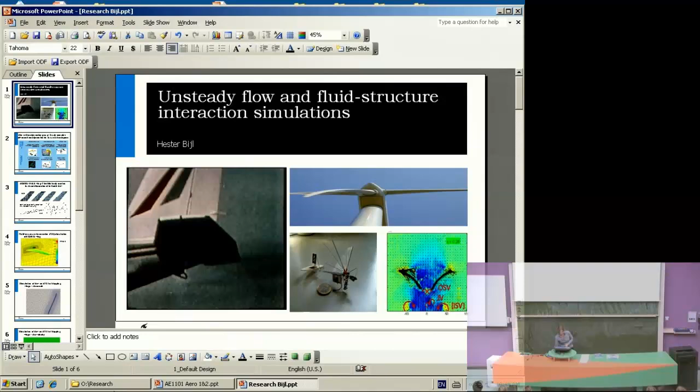Welcome. Yes, please, thank you. Welcome to the second part of the lecture series of Introduction to Aerospace Engineering.

My name is Hester Bijl. I'm full professor of aerodynamics, and I will teach you the part focused on aerodynamics the coming 2.5 weeks. The first lecture, the main book is Introduction to Flight. We hop a bit through it because the standard atmosphere in chapter 3 has already been treated, but I'd like to start with the basic quantities in chapter 2 today and then skip to chapter 4.

Nando Timmer, my colleague, is teaching the Dutch class.

So Anderson, chapter 2, and chapter 4.1 to 4.3 today. Quite important people for this part are Leonhard Euler and Daniel Bernoulli. Aerodynamics, as you probably already understood, having worked with concepts of lift and drag already, is crucial.

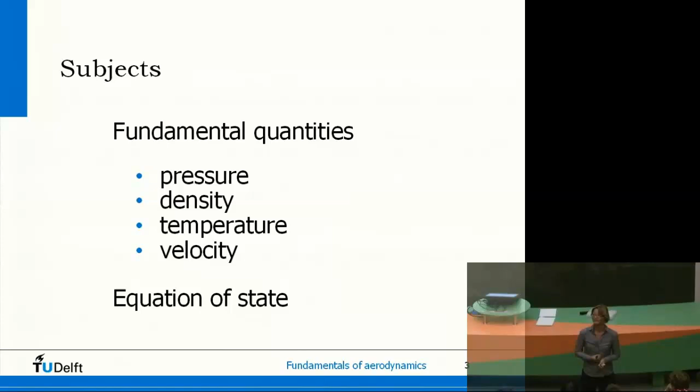Then the relation between these two, the equation of state, coming from chapter 2 - you've played around with it already with the standard atmosphere, but I'd like to make you aware of this relation between the basic quantities. Then in the second hour of the lecture, we will move to the relations between velocity - not only the basic quantities pressure, density, and temperature, but velocities and pressure. So: pressure, density, temperature, velocity, equation of state.

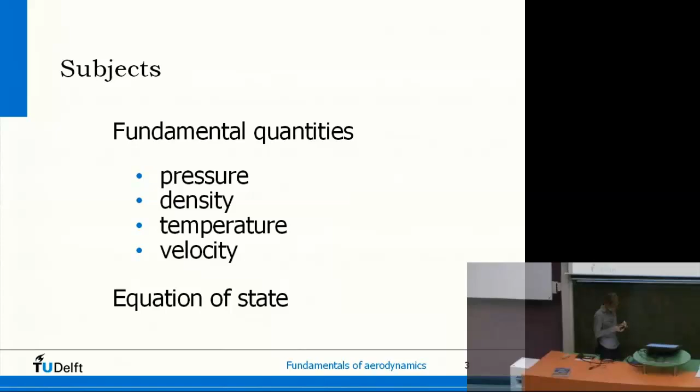No, this is not working. Yes. Okay.

So what is pressure? Well, pressure is what you feel when you push on something. Pressure is force on a surface. Quite often people get confused about the dimensions of pressure. If you think about what pressure is, you can push on your hand, or feel air pushing on your hand - if you put it outside a car window when somebody's driving, you can feel a certain force. Pressure is force on a surface, so it's the normal force - in a direction normal to the surface - and it's force per unit area.

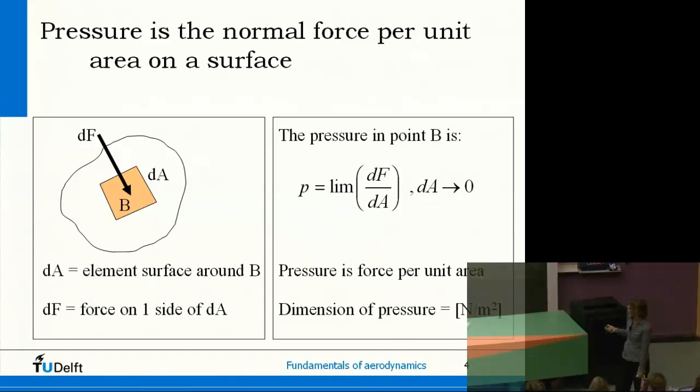So how do you then define pressure at a point? Because we work with pressures at points in this room or in certain flows. Well, you define this by taking an infinitesimally small surface area, thinking about the force on that, and then taking the surface area to zero. Then you have a definition of pressure at a point.

So suppose we have a blob of gas or flow, with a surface at this blob called B, and a certain small force on it in the normal direction. This is an element surface, with a small force dF on one side, in the normal direction. Pressure is defined as force per area - dF over this small area dA - in the limit when dA goes to zero, when the surface goes to zero. Then we have it at a point.

Important to remember is the dimensions of pressure. The dimensions of pressure is the dimensions of force divided by the dimensions of area. And we work with SI units, so that's Newton over meter squared. So this is important to remember, Newton over meter squared for pressure.

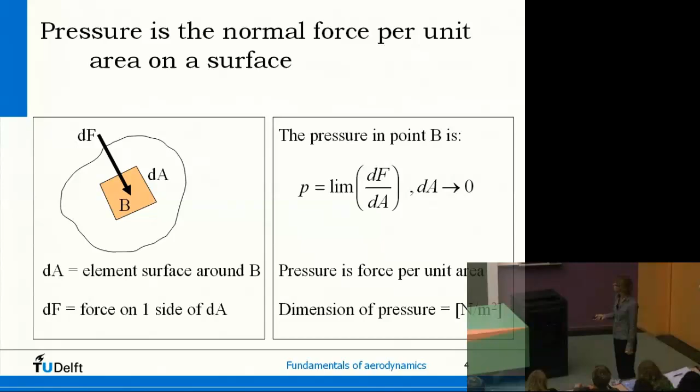Well, we can do the same with density. Density, we would like to talk about density at points in the flow, any point. Density says something about how many kilograms fit in a cubic meter, sort of how much a cubic meter of gas weighs. That's sort of a volume. So how do we go from this volume to the point?

We do the same trick again. In this case, we have a very small volume, dV, here at this point B. And then we say, density of a substance is mass per volume, so kilograms per meters to the third. We start with this very small volume, and we know how much it weighs, and then we take the volume to 0. So density is then the small mass of this volume, dm, over the small volume, dv, when we take the volume to 0.

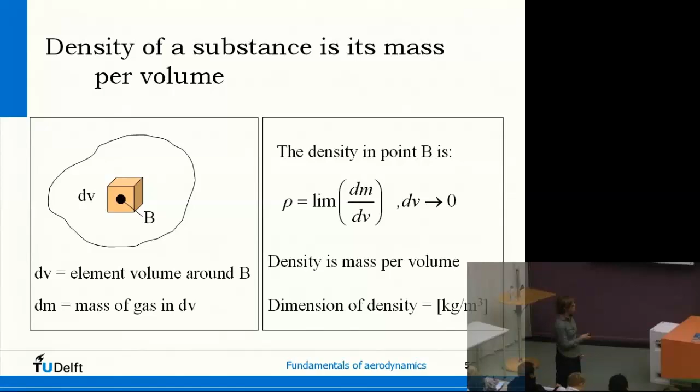And then, of course, what is the unit? The unit of density is the unit of mass per volume, so kilograms per meters to the third. So again, then we have it in a point.

So that was pressure, density, now temperature. Temperature is defined differently. The temperature of a point in a gas is related to the kinetic energy of the gas. And what is kinetic energy? Well, each gas or liquid consists of molecules, and these molecules move. They have a certain kinetic energy, they sort of vibrate. And this vibration, this kinetic energy, is related to the temperature.

And this is one of the fundamental relations of temperature, you see it here, T, and kinetic energy. How are they related? They're related linearly with a certain 3/2 and a certain Boltzmann constant, which has a dimension, Joule over Kelvin. So a high temperature reflects a high kinetic energy in the gas, so the molecules are sort of vibrating quickly.

What dimension of temperature do we work with? Well, of course, if you're Dutch, you're very used to Celsius, 15 degrees Celsius, 20 degrees Celsius. But actually, we prefer to work with Kelvin. So we work with the dimension of temperature, Kelvin. The relation between Kelvin and degrees Celsius is not so hard. They only have a different point of 0.

So Kelvin, you can work from the one to the other, like with this: Kelvin is 273, if you want to be very accurate, 273.15, plus Celsius. So 15 degrees Celsius is 288 Kelvin.

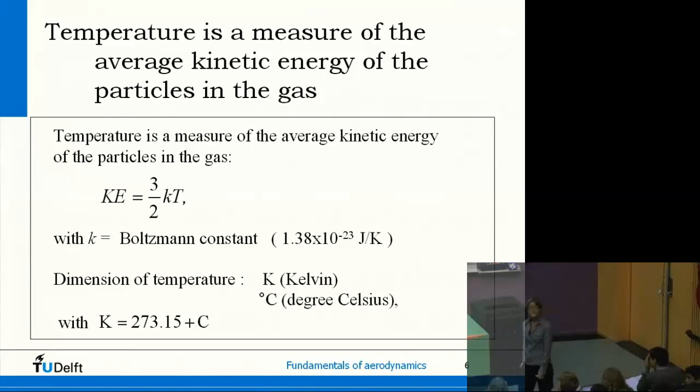Now, what is important is the relation between these three: we have pressure, density, and temperature. And they are related. So once you know two of them, you can find the third. And how are they related? That is with the equation of state, it's called. And the equation of state is the following.

There are different forms. Some people at high school have had a molecular form, where they think about sort of moles of gas for the equation of state. We think of the equation of state as points in our gas, and the only difference is that we have a slightly different gas constant in this equation of state. So the relation is the same, but we have a different form of the constant. But please, this one you really should remember, crucial.

An aerodynamicist and an aerospace engineer should be able to wake up in the middle of the night and reproduce the equation of state. Crucially important. That is the relation between pressure, density, and temperature. Now, how are they related? P is rho RT, and this R is the gas constant.

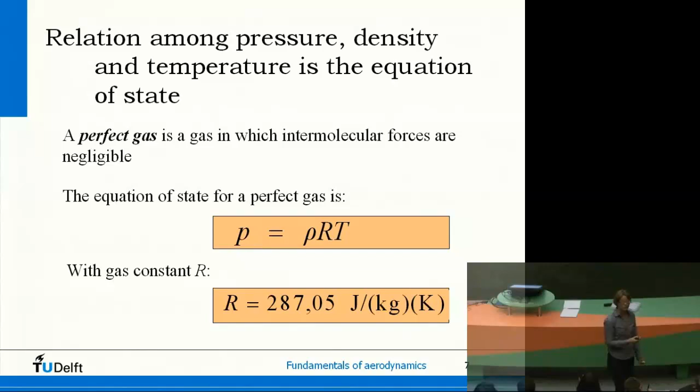When you really compress the gas very much and the molecules come very close, you have a non-perfect gas anymore, and then you can get additional terms in your perfect gas equation. These are terms with constants A and B, and you get a more complex relationship. You get P over T in here and P over T to the third. This is called the Berthelot equation.

A and B are constants, like R, the gas constant, but they have different forms.

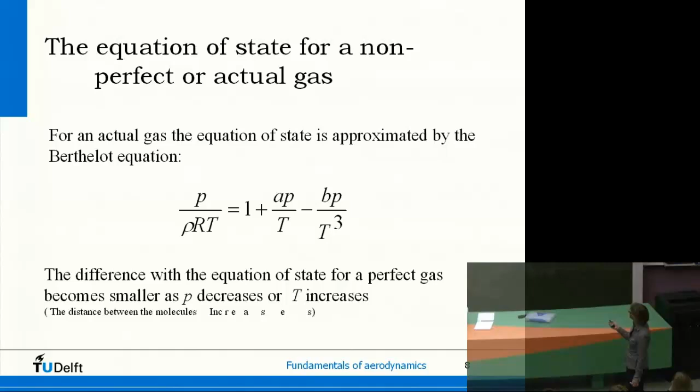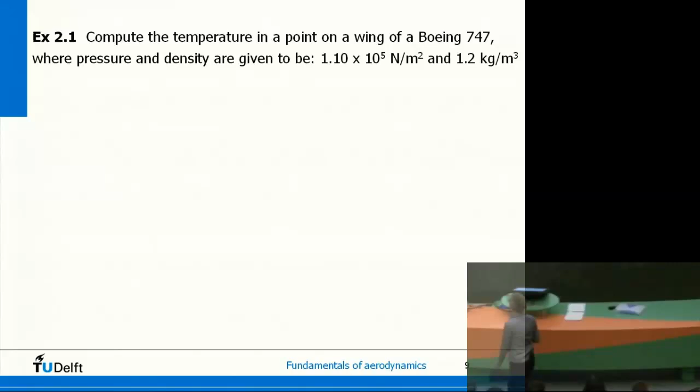Okay, so now that we have the equation of state and we have P, rho, R, and T, we can play with these things and start making very simple examples. So the first example is to compute the temperature on a point on a wing. It's example 2.1 from Anderson, from the book.

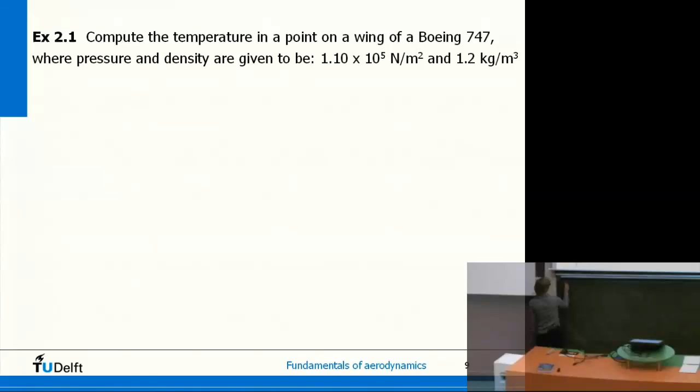On a point of a Boeing 747 where pressure and density are given. Well, what relationship do we have between pressure, density, and temperature? Rho RT, P is rho RT. Indeed, equation of state.

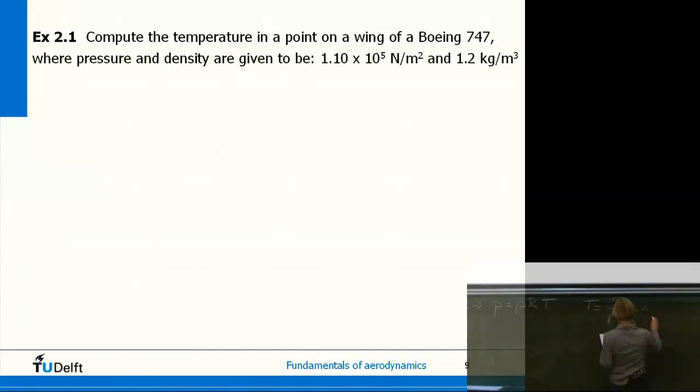We're looking for the temperature, so we have P is rho RT, so T is P over rho R. Well, simple, pressure is given as 1.1 times 10 to the power 5. Rho is given as 1.2. What do we do with R? 287, yes, perfect.

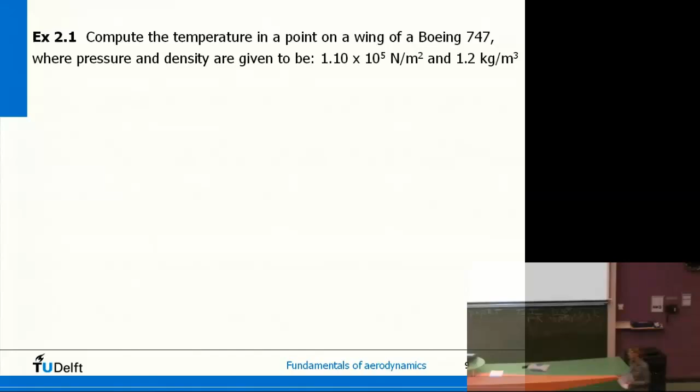And we find that it's 319 Kelvin. So simple relationships we can play with. Of course it will be more difficult later. Then there are certain conditions that you need to remember. You cannot remember, of course, all conditions at all heights.

Jacco Hoekstra introduced you to the standard atmosphere. You should remember the values of rho, P, and T at standard sea level conditions. And what are these? Well, P is 1.01 times 10 to the power 5, or if you want to be accurate, you take into account the 325. So 1 atmosphere actually, that's the pressure at standard sea level conditions.

The density is 1.225 kilograms per meter cubed. And the temperature at standard sea level conditions is 15 degrees Celsius, which is equal to 288 Kelvin. So please also remember these, it's important for an aerospace engineer. Also on the exam, we assume that you know these conditions. All the others you can of course derive using the standard atmospheric relations.

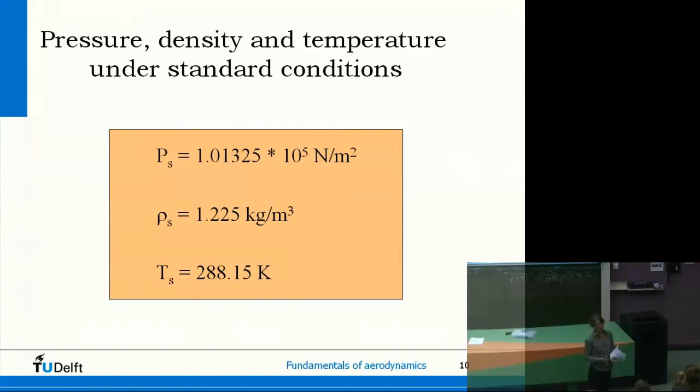Okay, then we can also do something like computing the total mass of air in a room, something like this, 30 meters by 50 meters by 3 meters. We will use the computational approach for this later in the second lecture. So how do you go about this? Suppose I ask you: what is the mass of air in this room?

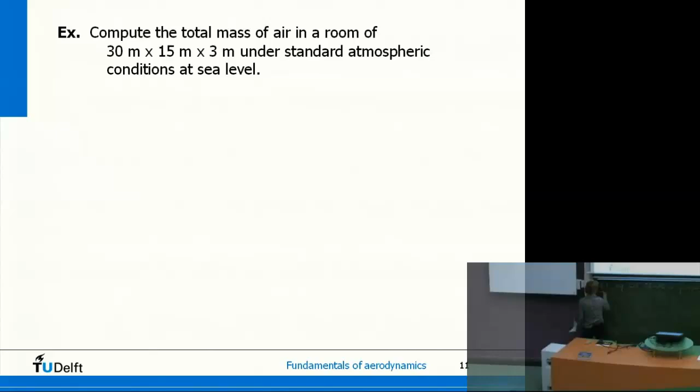Density, very good start. Density is mass per volume. So mass is density times volume. So what is the density?

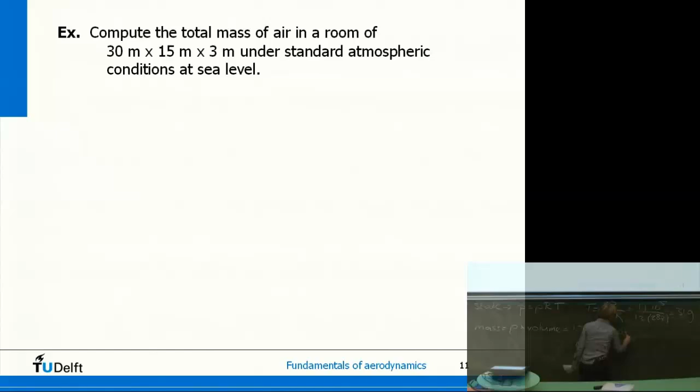Standard conditions, 1.225, thanks, so standard rho at standard sea level. The volume's given there, 30 times 15 times 3. The volume is actually 1,350 meters cubed.

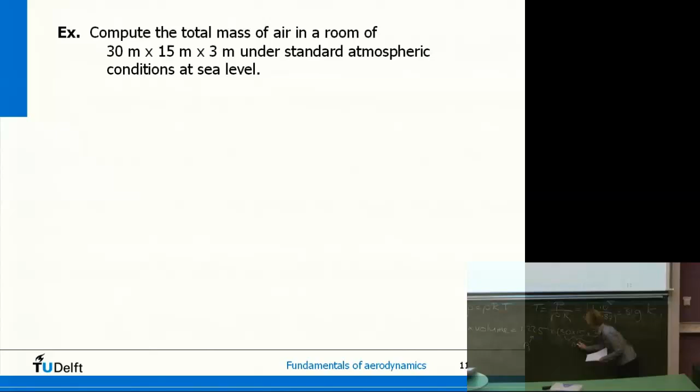Sorry, meters to the third, thank you. And then you find that the total mass of air in this room is 1,654 kilograms. So quite a bit.

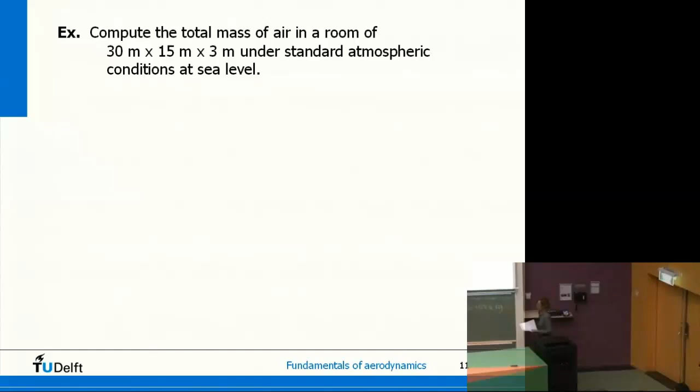And indeed, if you have no idea how to do this, you can think, okay, density was kilograms per meters to the third. So through the units, you can come to this solution.

Now, density tells you something about the mass of a cubic meter, so how much it weighs, or the mass of this lecture hall. But sometimes it's the other way around. You're interested in how much space a kilogram of gas occupies. And that is the specific volume.

We're struggling a bit with the notation. So the curly V is used in Anderson, and I will try to stick to that. So the definition is very simple, 1 over rho.

So the dimensions of the specific volume: specific volume is 1 over rho, so that is 1 over kilograms meters to the third, so it's meters to the third per kilogram.

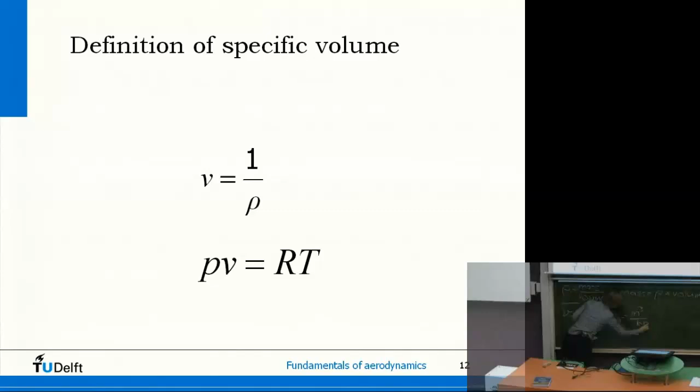So it's quite simple. Why would you even be bothered? Well, sometimes it is easier to think about how much space a kilogram occupies. And then you get a slightly different form of the equation of state. P is rho RT, so we had rho here. So if you have the specific volume, 1 over rho, you have P divided by rho is RT, or PV is RT. We will get some other V's for velocities later.

So small curly V is specific volume. Okay, and then you can do simple things like this: compute the density and specific volume of air in a wind tunnel at a certain pressure condition and a certain temperature.

So how would you go about this? Choose the right units first. So let's see, compute the density. Density, we're looking for density in kilograms meters to the third. The right units. So we have P in atmosphere and temperature in degrees Celsius.

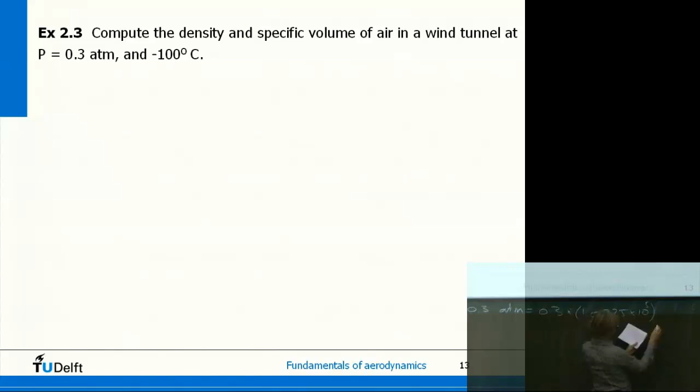So how do we go from atmosphere to newtons per meter squared? 101,325, exactly. So this you should always remember. So 0.3 atmosphere is actually the same as 0.303 times 10 to the power 5 newtons per meter squared.

Then we have a temperature, but it's in Celsius and we need it in Kelvin. Simple again: minus 100 degrees Celsius is equal to minus 100 plus 273, which is 173 Kelvin.

Now how do we compute the density? Density? Anyone? 1 divided by the specific volume. Sure, so how do we compute the specific volume? Rho V is equal to RT. Sorry, PV is equal to RT, right? Or P is equal to rho RT.

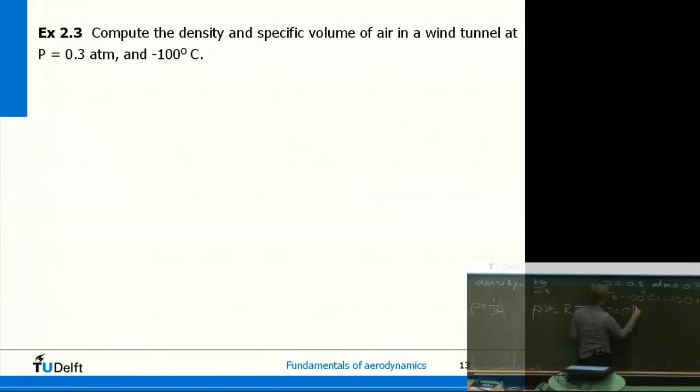Okay, let's take the PV form. So V is equal to RT divided by P, is equal to R is 287, temperature we just computed 173, divided by the pressure 0.303 times 10 to the power 5. And then we find the specific volume, 1.6 meters to the third per kilogram.

So PV is equal to RT, and then indeed rho is 1 over that, and we find 0.61 kilograms per meters to the third. So simple. You could of course also compute first the density and then the specific volume.

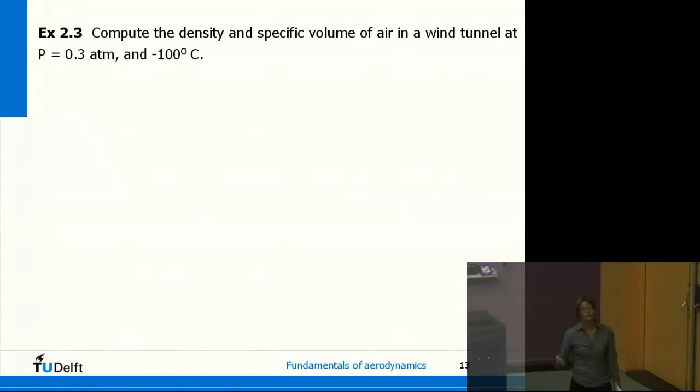So these were all point properties and scalar quantities. So these quantities, pressure, density, temperature, are scalar values. Of course, in the flow, we also have velocities. And velocity doesn't only have an absolute value, a speed, but also a direction. So we have here a vector, a velocity vector.

So it has a certain length, a certain absolute value, and a direction. And then what is the definition of the velocity? Well, the definition of the velocity is the length it travels over the time it travels, and this length then has a direction. So it's ds over dt, and again, we want to talk about velocity at points, so we take the limit to this point. So a very small fluid element sweeping through the very small length it travels over the very small time.

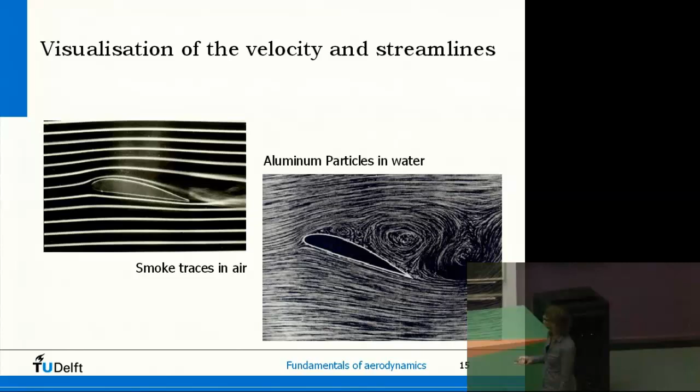Here we have almost leading edge separation. So you see the flow doesn't really follow the object, but separates. You get large blobs, sort of a dead air region, large vortices. And this has a detrimental effect on your lift. So it's crucial to know when you have stall characteristics. So, visualization, velocity. Now some more definitions.

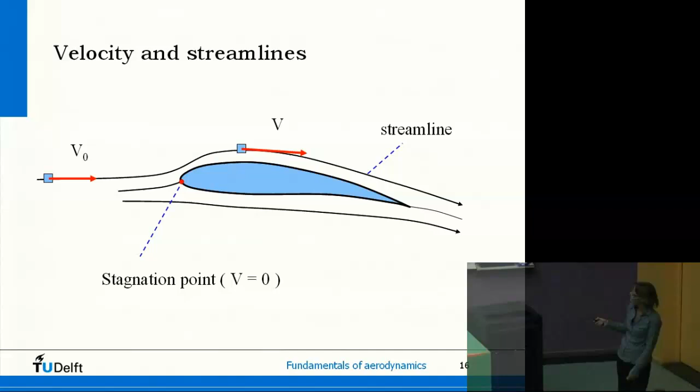So we have a definition here: the stagnation point. As you saw, the flow comes over the wing, the streaks of the smoke from the previous picture. You get streamlines like this. At a certain point in time, the particle is here, later there. We have here a stagnation point, and that is defined as the point where the dividing streamline hits. All the flow above this dividing streamline goes on top. All the flow below goes below. So that's a stagnation point.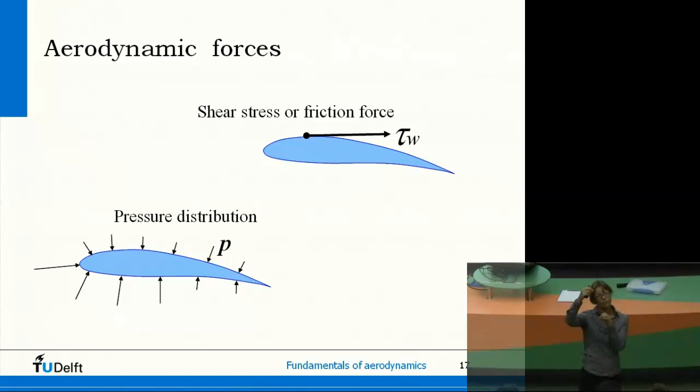So here we have pressures. And the other force is then in the tangential direction, so along the surface. And that's called shear stress or friction force. Any flow, even air, has this, because really at the surface, the velocity is zero. Further away from your wing, you have quite a high velocity, and then inside the boundary layer, the velocity decreases to zero. And this gives a friction force on your object. More on this in the viscous flow chapter.

So, two aerodynamic forces: pressure forces and tangential forces. Which one is the most important in general for lift? Pressure, yes. Because we're looking for lift, of course, an upward force. If we have a very high angle of attack, tangential force has a certain contribution, but the largest contribution in the direction of the lift is due to the pressure.

And does this airfoil have a positive lift, you think? Yes. How do you see? How do you find it? You integrate pressures, right? Yes. So you think about how much force you have pushing it down, how much force you have pushing it up. So you integrate the pressure over your airfoil, and you find that the net contribution of all these arrows of the pressures is up. Okay.

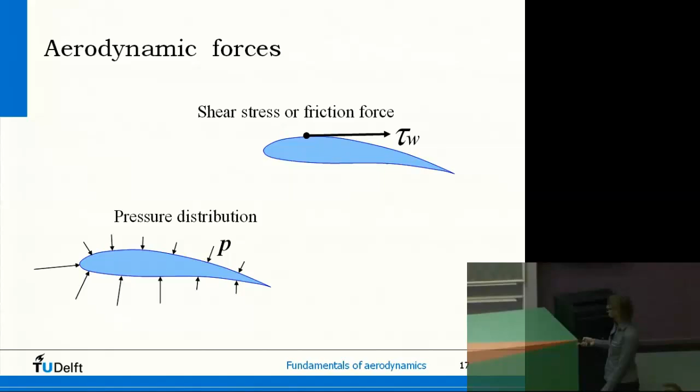Now, for you to practice, this will only take you 5 minutes, but please practice with this equation of state. It has to be standard because we make it more difficult every lecture. So once you're automatic on this, you never have to look at it again. So I advise you to do some small homework exercises. Problems from Anderson. I'm not sure it's still the page number because it might have been the previous edition. So it is on page 107, sorry. So instead of 102, if you have the latest edition, it's 107, in the 7th edition.

Any questions about this part? No? Okay. Then we continue.

So first, introduction to the basic quantities: pressure, density, temperature, and the velocities. So far we only have a relation between the scalar quantities, the equation of state. So what we're looking for now is a relation that includes the velocities as well.

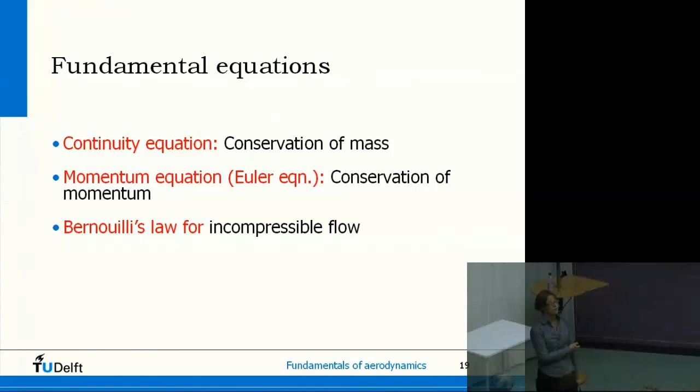So conservation of mass and momentum today, then energy, which is more relevant for high-speed flows, I will teach you next lecture. The conservation of mass equation is called the continuity equation, the conservation of momentum is the momentum equation, and we have a very simple form of the conservation of momentum for incompressible flows. I will tell you what incompressible flows are, and this is called Bernoulli.

So, first, the conservation of mass. I will clean the blackboards.

So this is a stream tube, we call it. It can be a real tube, but it can also be a stream tube in your flow with streamlines. If we have a streamline here, and a streamline there, and along we have streamlines, then flow that goes through this doesn't go out or in at the sides, because the streamlines are the direction of the flow, so nothing will go through the sort of walls. So just think of this as a tube.

And we have an inlet and an outlet, and a specific amount of time. Well, what happens to this tube if we have a steady situation? Actually nothing—the total mass of this tube remains the same, right? So what flows in a certain amount of time has to flow out. Mass is not created or destroyed. So if the mass is the same, what flows in has to flow out in a certain amount of time.

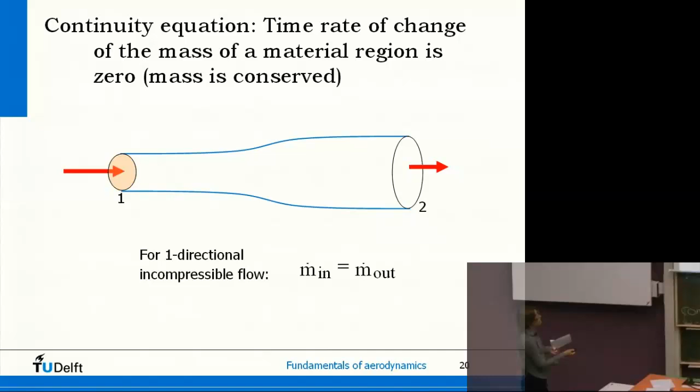So conservation of mass, it's rho AV is constant. Density times area times velocity is constant, and this is indeed the mass flow, so m dot. So what flows in, it's written here also, what flows in flows out, so dm/dt in is dm/dt out. dm/dt, the dm, the mass, is density times volume, rho times AV dt. The dt is dt, so the mass flow is equal to rho AV. Rho AV is constant, so whatever cross-section you put it at, rho1 A1 V1 is rho2 A2 V2.

Now, please note that also your density can change here. So for compressible flows, for flows around aircraft like Boeing 747 or so, the flow goes up to 0.8, sort of 80% of the speed of sound. And that's still subsonic, so the speed is lower than the speed of sound, but quite high relative to it. And as a result, we have significant density changes in the flow, so density plays a role here too. And with supersonic flow, it can even change very, very much the density and have a very strong effect on this.

However, for incompressible flows - and incompressible flows don't really exist, they are an assumption - the assumption is the density doesn't change significantly. When is this assumption valid? When you have liquids. Liquids, oil, water, we don't have much density changes. In a gas, you can compress it, and you can get the molecules closer, and you get strong density changes. Liquid and oil, it's much harder. However, with air, you can also have the incompressible flow assumption making sense.

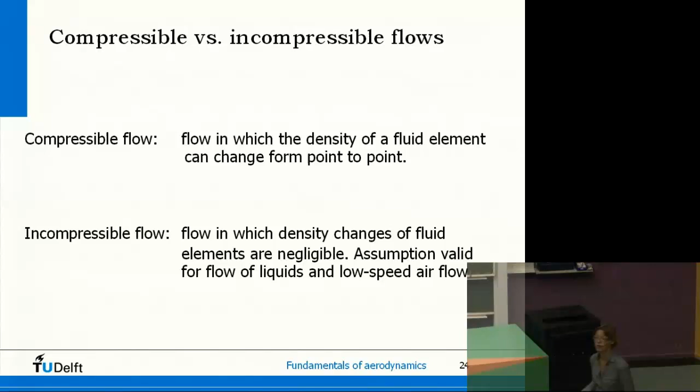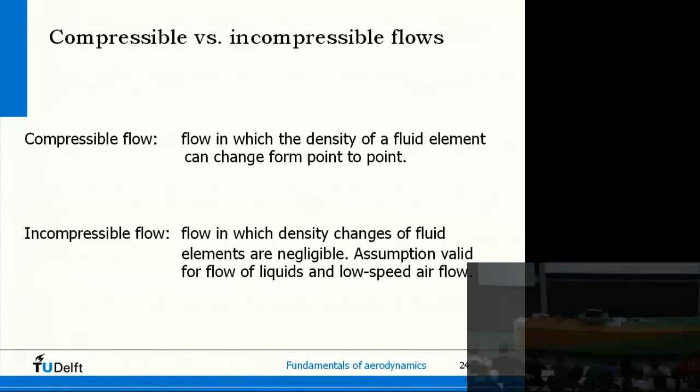Two types of flow, compressible flow and incompressible flow. And for incompressible flow, we have then a simple relation. So incompressible flow, rho is then constant in the flow. So AV is constant, so area times velocity. So suppose I have a duct like this.

Velocity. Yeah, it's a bit tricky, so I try, if I have volume, I try to write out vol, specific volume, curly V, but capital V is mainly velocity.

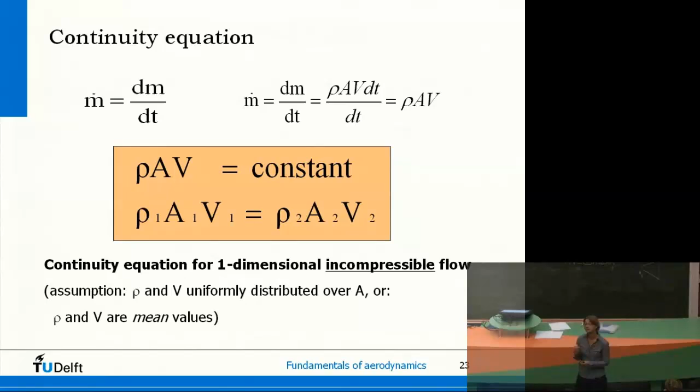For incompressible flow, we have AV is constant, so you get a very straightforward relation. If your area doubles, for example, your speed halves. But be aware that this is only for incompressible flow, really low speed subsonic flow for air. Because for highly compressible flow, supersonic flows, you can have the area increase and the velocity increase as well, because the fluid expands and the density changes so much. So in supersonic flow, if you increase the area, your speed increases. So AV is constant just for incompressible flow; in general cases you must incorporate the density.

Now we can do a simple example again. Suppose we have a converging duct, a converging channel, the other way around. So a converging duct is like this: flow in, flow out. Inlet area is A1, 5 meters squared is given. V1 is given, so the entrance velocity is given. And we have, of course, an A2, exit area, and a velocity at the exit. The question is to compute the area of the duct exit, A2.

So which relation can we use? AV is constant. Can we do this? Can we leave out the density, the rho, assume it's constant? Why? Because it's low speed, below 100 meters per second. The fastest speed is at the smallest exit. We don't know it yet, so it makes sense to check afterwards, but let's assume we have 5 meters per second, so we have 10 meters per second here, so probably we will not reach 100 meters per second, but it's worth checking. Oh sorry, we have it already. Yes, it's 30, so indeed the fastest speed is 30 meters per second, way below 100.

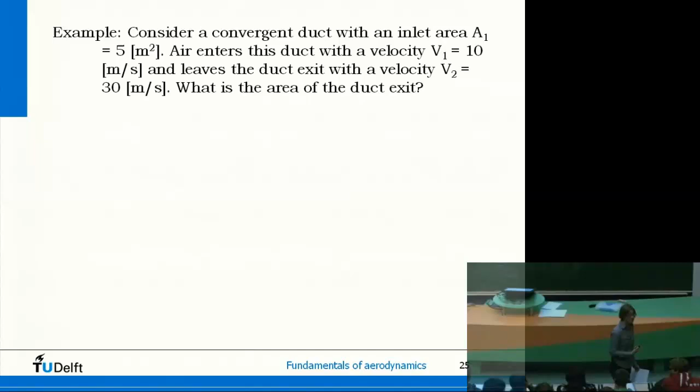Quite often in exam questions, we let you compute, or we give a point with a maximum speed. Then you can say, okay, that point on the wing is close to the maximum speed of the flow, that is below 100 meters per second, so I'm safe. That's what you generally do. In general applications, cycling, cars, gliders are really low speed subsonic. Takeoff and landing might be a bit faster but still low speed subsonic, but cruise flight of commercial aircraft is really not low speed subsonic—subsonic, transonic, but not low speed. So from the application itself you can already get a hunch.

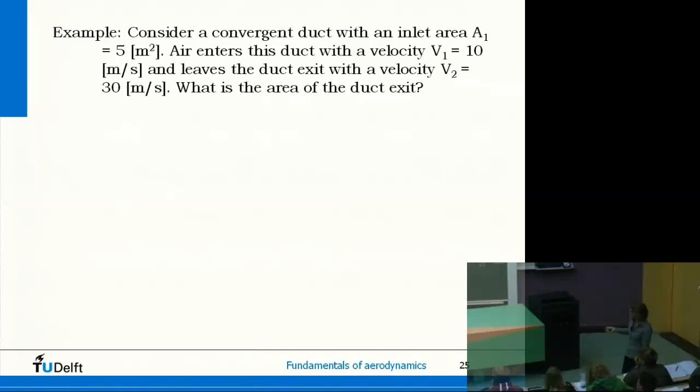That might be worth checking because you sometimes make mistakes. The area decreases and indeed the speed increases, so for low speed subsonic, that makes sense.

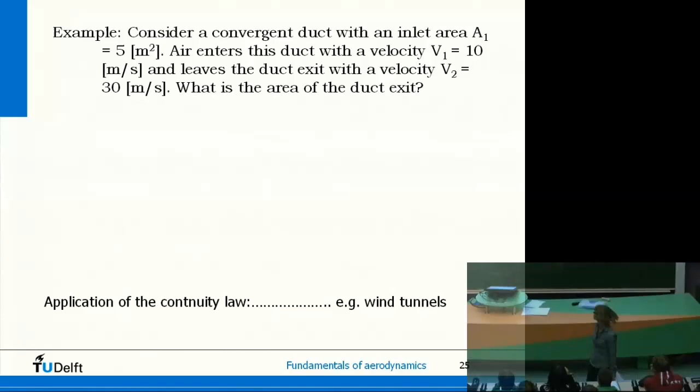One important example where we really use this conservation of mass is in the design of our wind tunnels. This is the latest wind tunnel, built two years ago, called the Open Jet Test Facility. We use it for flow investigation, especially around large objects like wind turbines. If you have a closed test section with a large object inside, you get a very strong influence of the walls, so this is a wind tunnel without a closed section, a large open section. It's actually built on the other side of the street, and air blows out in a large hole—the cross-section is comparable to the lecture room. This is the test section, where we put the wind turbine or wing or whatever we want to test.

Now, how does this wind tunnel work? We have here a large fan which speeds up the flow, going through certain vanes here because we like the flow to be as low turbulence as possible. So we like to damp out all the small scale perturbations in the flow, and we do that with vanes leading it around the corner and with an anti-turbulence screen, where it goes through certain screens to damp the small scale perturbations. Then the flow is blown over the object here, and we measure pressures, for example, forces.

But we can also do particle image velocimetry, have smoke here or particles, and using laser light, illuminate it, take pictures. Then the whole story for my colleagues starts because you have pictures with particles at certain time instants, and you have to then correlate them, and that's quite a mathematical exercise.

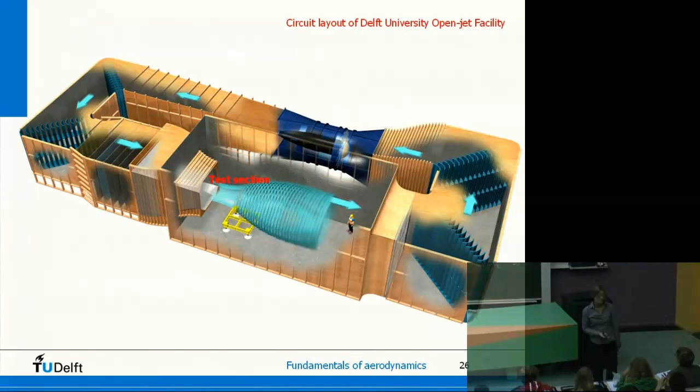Can we go visit it? Yes, you will actually have a practical project inside here. So inside the Open Jet Test Facility, you will have a practical on aerodynamics, measuring forces. And you can always come in, you have to activate your campus card for the aerodynamics laboratory. Then you can always come in and have a look while they're doing tests. The Nuna car we also put in there.

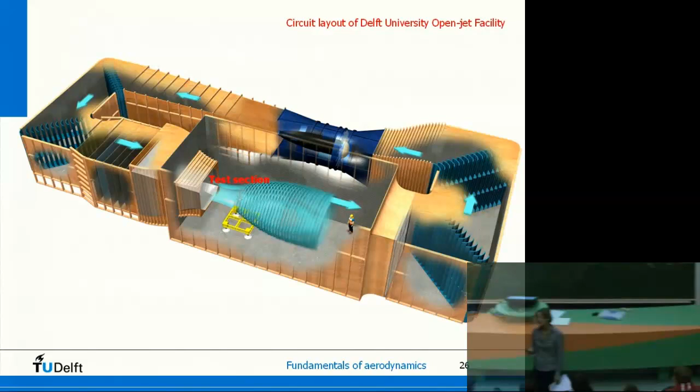And then the flow, of course, is sent around again, and sped up again here. So that's the Open Jet Facility. We have a large range of wind tunnels. This one is for low speed research, and it can go up to 35 meters per second. We also have hypersonic test facilities where we can go up to 11 times the speed of sound, but that's much smaller.

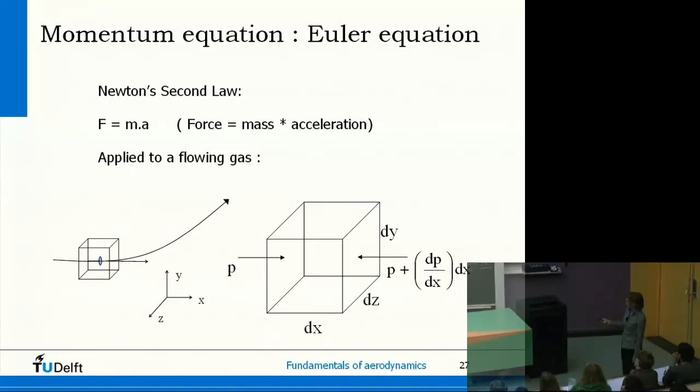Then I take pressure forces in that direction as positive. So this one is P, and that one is minus P plus dP. So let's look at the left-hand side of F equals m times a, so forces. Now indeed we have pressure forces, friction, and gravity. We neglect gravity, it's small, and we neglect viscosity and friction forces, so we only look at this pressure force.

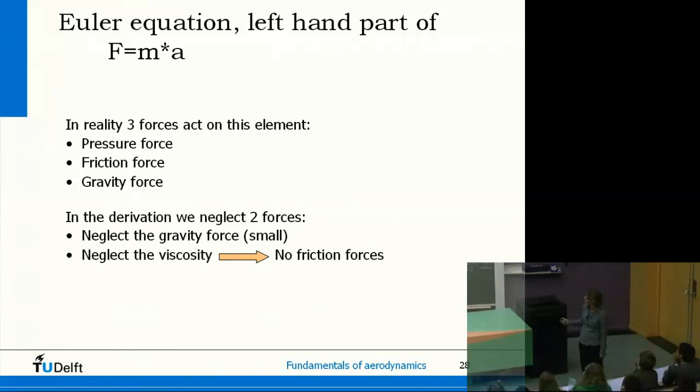Now, the force in the x direction: the total force, we have here a pressure on this area. And pressure was force per unit area, right? So if we multiply pressure by area, we get the force. So we have the force in that direction, P times the area of this side, and that is dy by dz. So P dy dz is pushing the element in that direction.

Then on this side we have a slightly different P, namely P plus dP, or we can write dP as dP over dx times dx. It's easier for later, but you can of course eliminate these dx's. So on this side we have P plus dP, but in the opposite direction, and I call this negative, so minus. So the total force is the force on this side minus the force on this side. Well, the force on this side is P plus dP, times the area, same area, dy dz.

So, P dy dz minus P plus dP over dx, dx dy dz. So, P dy dz minus P times dy dz, so that one drops out, and we're only left with this one. So the net force on the fluid element is equal to minus dP dy dz, or minus dP over dx, dx dy dz.

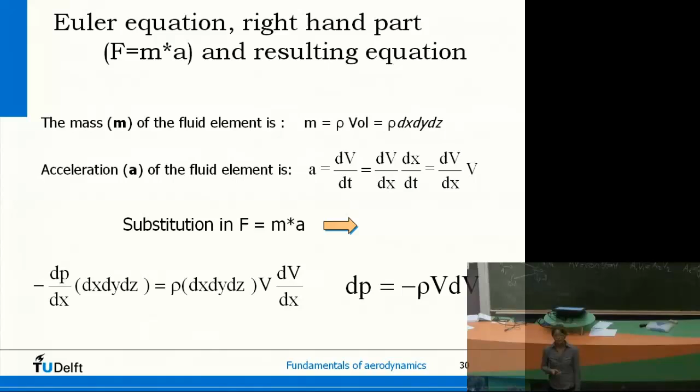Can I now just integrate and do something in general? If we try hard enough, yes, but it's a bit complicated because these are all differentials, these d's. To get a normal relationship, you typically integrate. On the left side it's not difficult, you have just pressure. But on the right-hand side we have rho's and v's, so indeed it's a bit hard.

So we make our life easy and first derive a relationship for... any ideas? How can we make life simpler? Integrate this, pressures, and can we assume one constant, not changing on the right-hand side? Density constant, thanks. For incompressible flows this is not hard, right? We have just dp and vdv. So we'll now do the derivation.

So this is still valid. The differential form is valid for compressible and incompressible flows. We will now integrate it for incompressible flows. Please remember this, and you should be able to derive it. We might ask you at the exam to derive Bernoulli's equation, because it's important to be aware of what you neglect: gravity, friction. It's not too tough, and then you see where your relation actually comes from. The first step leads to this equation we just derived, and it's called the Euler equation. Mr. Euler came up with it, and it's quite a useful relation.

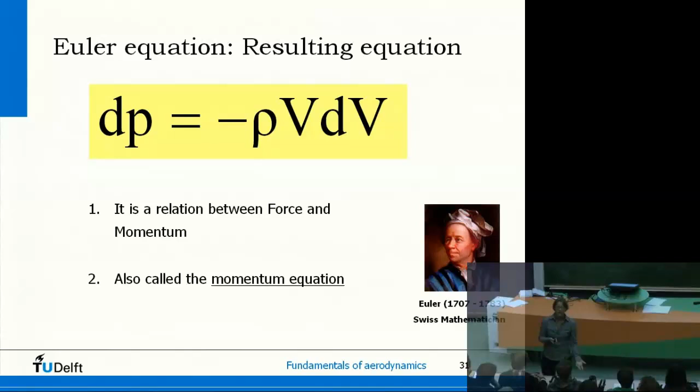Okay, now getting to something non-differential, we're going to integrate this differential equation and make our life easy. We assume density constant. Then we integrate this along a streamline, from point 1 to point 2. dp is minus rho v dv, or dp plus rho v dv is equal to 0, and we integrate it from state 1 to state 2. In that way we hope to get a relation between pressures and velocities in point 1 to pressure and velocities in point 2, okay?

Now, integrate dp plus rho v dv. Did I have it written out? No, sorry. So then we need the primitive value, right? So we have from state 1 to state 2, dp, plus from state 1 to state 2, rho v dv. We assume this one constant.

So what is the primitive value of dp? P, yes, between p1 and p2. Plus, what is the primitive value of rho v dv? Rho v squared divided by 2, right? Because rho is constant we can take that out. V squared over 2, if we take the derivative of that we have 2v over 2, so we get v dv, between state 1 and state 2. So that is pressure in point 2 minus pressure in point 1, plus rho v2 squared divided by 2, minus rho v1 squared divided by 2, is equal to 0.

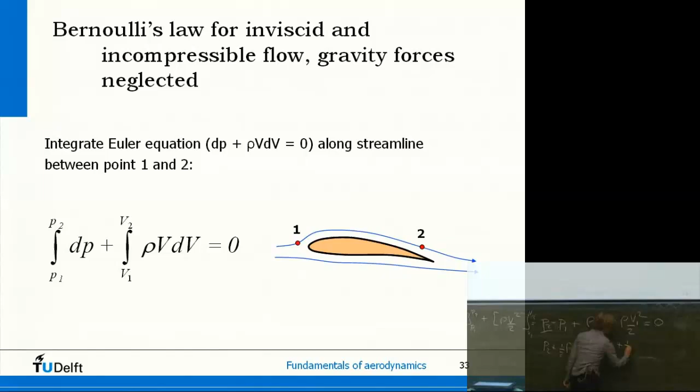Now we collect all state 1 terms on one side and all state 2 terms on the other side, so we get P2 plus a half rho V2 squared is equal to P1 plus a half rho V1 squared. And that's our nice friend, the Bernoulli equation.

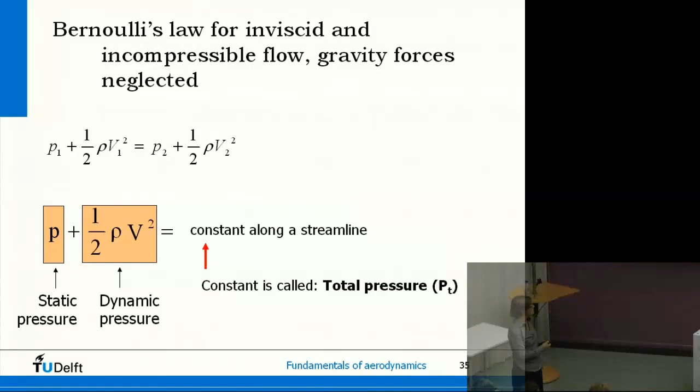So what does this tell us? P plus a half rho V squared is constant. I can write it for state 2 and state 1. It's constant along a streamline, since I'm integrating along a streamline. So if the pressure goes up, the velocity goes down, and if the pressure goes down, the velocity goes up. The total sum is constant. Now we have a name for this constant, and it's called the total pressure.

Please be aware, what is the dimension of this equation? We have pressure, newtons per meter squared, plus we add something, so the dimension of this is also newtons per meter squared. This is a pressure, and this is a pressure related to the flow. We call this the dynamic pressure, and we call this the static pressure. The total sum of these pressures we call the total pressure, or stagnation pressure.

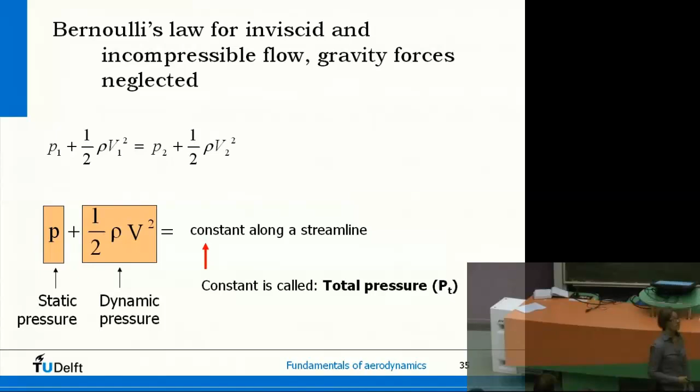How do you find this? If I'm interested in figuring out the total pressure of a certain flow, what is it equal to? Pressure in a stagnation point. Yes, because if V is equal to 0, this term drops out, and you have the static pressure in a stagnation point, or in a very large reservoir for example, where the velocity is almost 0.

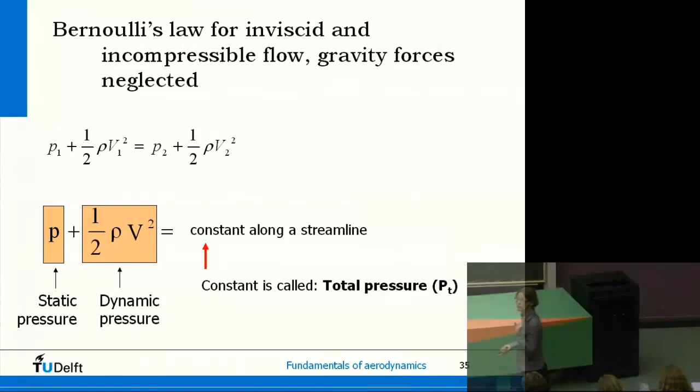That is the total pressure of your flow. Can it change? Not for incompressible flows. For compressible flows, you can have changes of total pressure. For incompressible flows, not, because that's what is staying constant here. Total pressure is always the same, and it's equal to P plus a half rho V squared. Please be aware we neglected gravity and friction, and this is only true for steady flows.

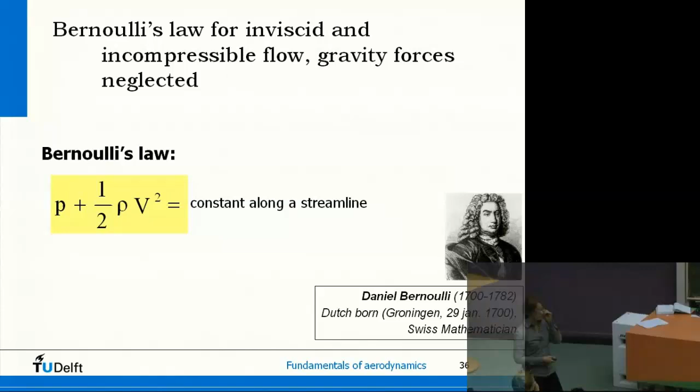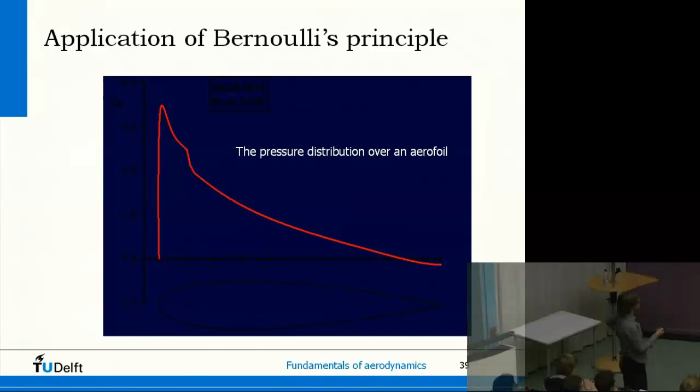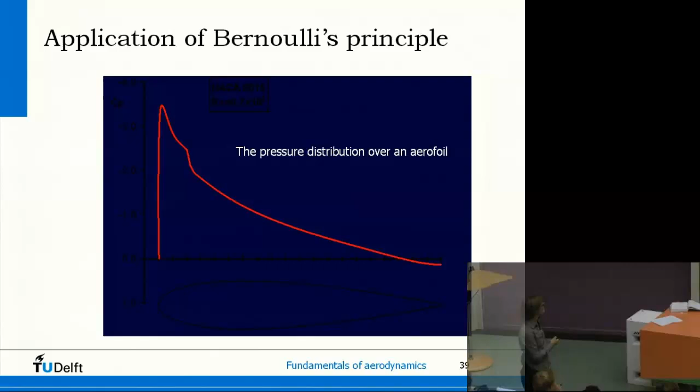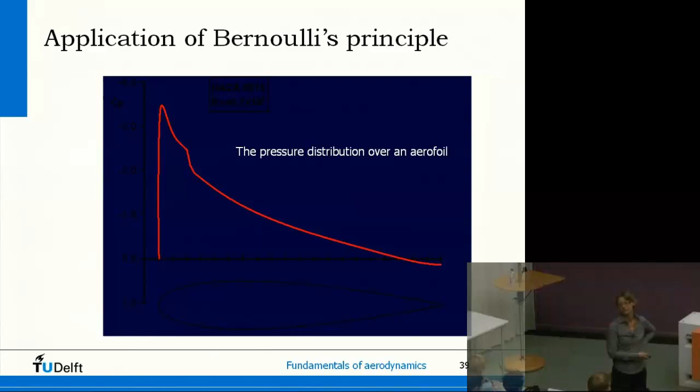Now this is also an effect of the Bernoulli equation. If you apply Bernoulli's principle to flow over an airfoil, we see here an airfoil. This is minus Cp, so we made it non-dimensional, minus the pressure on the top of the airfoil, going down because it's larger in the minus sign, and then the pressure goes up. So what you see, if you go along the chord on the top, the pressure goes down, the flow speeds up, pressure goes down and then goes up again. So you see here the suction peak close to the leading edge, which contributes quite a lot to the lift, but more on that in chapter 5.

Well, where we came from, right? Now let's practice.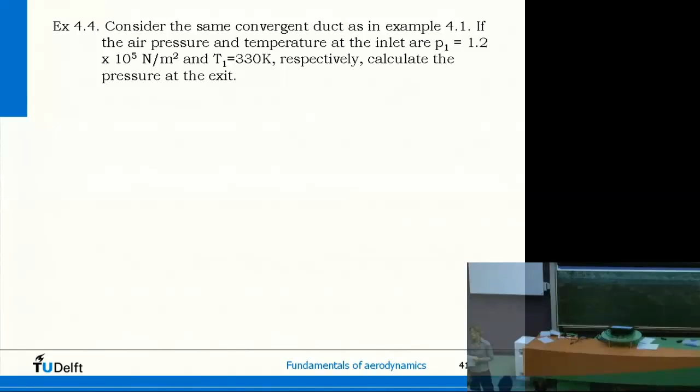Do we have low speed subsonic flow? Does anyone remember the maximum speed we had? 30 meters per second, thanks. So yes, we can. Okay, Bernoulli's law.

So P1 plus a half rho V1 squared is P2 plus a half rho V2 squared. And the one we're looking for is P2. So P2 is equal to P1 plus a half rho times V1 squared minus V2 squared.

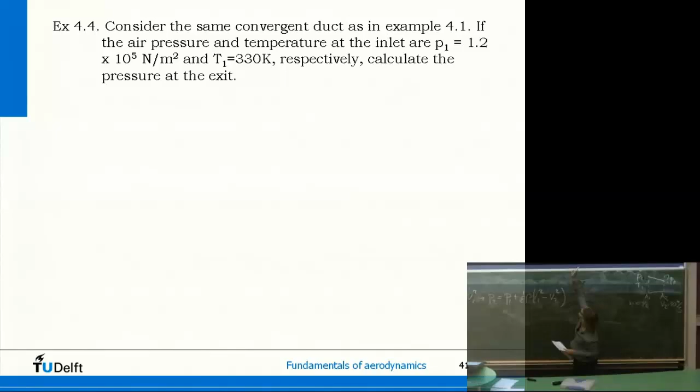Now we had V1, 10 meters per second. We had V2, 30 meters per second. We have pressure at 1, the inlet, 1.2 times 10 to the power 5. We don't have the density yet.

How do we compute the density? What is the relation we can use for the density? Rho is P over RT, equation of state. P is rho RT, so rho is P over RT.

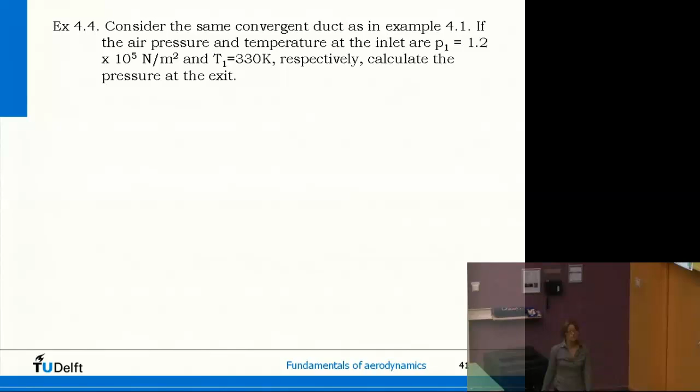Now, we assume the density is constant here for Bernoulli, since it's low speed flow. Rho constant, so we can compute the density anywhere in the flow. But where does it make most sense? Where do we have the most information to do this? At the inlet. Yes, we have pressure, we have temperature, so we do it at the inlet, at 1.

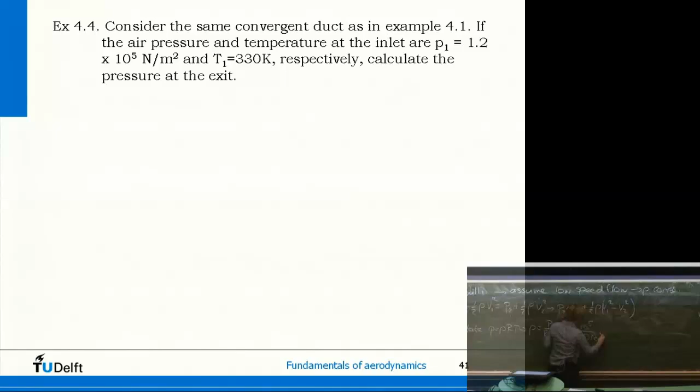So that's equal to 1.2, the pressure at the inlet, R is still 287, and the temperature is 330 Kelvin. So then we find the density: 1.27 kilograms per meter cubed.

Now we're there, we just have to substitute it into the Bernoulli equation. So P2 is equal to P1, so that is 1.2 times 10 to the power 5, plus a half rho, 1.27, times V1 squared minus V2 squared.

Now please note what is happening here. The pressure at the exit is the pressure in the inlet plus something, and we have here 10 squared minus 30 squared, right? So this is a negative number. So we subtract something from the inlet pressure. So the outlet pressure is lower than the inlet pressure. Does that make sense? Yes, indeed, because it's going faster, right? 30 meters per second, 10 meters per second, incompressible flow, Bernoulli, so indeed. So that's always a check you can do to make sure you didn't make a mistake.

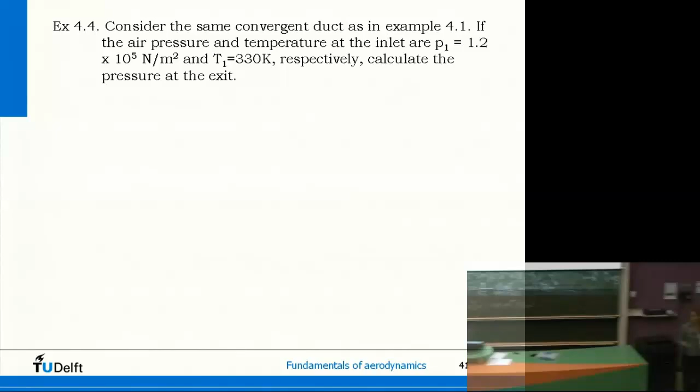And if you compute it, you find indeed that the exit pressure is slightly lower than the inlet pressure, 1.195 times 10 to the power 5. Please note also, it's not a major dramatic pressure change, right? From 1.2 to 1.195. And that is also representative for incompressible flows, for low speed flows. If you have compressible flows, high speed flows, you get much more dramatic pressure changes and density changes.

Questions about this? Wow. I hope you will not be ill tomorrow. Bless you.

Okay, one more example before I let you go, and this is, instead of a channel, a bit more relevant for aircraft applications. Airfoil in a flow of air. So here we have our airfoil. We have upstream conditions, far field conditions, where we didn't know there was an airfoil. And they are given: pressure, 1 atmosphere, velocity, 150 kilometers per hour, and density, 1.225 kilograms per meter cubed. Now, at this point, on top of the airfoil, a pressure is given.

Now, the question is, what is the velocity in this point? So this airfoil is in an oncoming stream. So you can assume it is a wind tunnel test, for example. Right? Wing in wind tunnel, we blow air over it, air of 150 kilometers per hour, and we get certain flow conditions on top of the airfoil. So how do we go about this? What relationship do we need? Bernoulli, indeed. Velocities and pressures again. So we start with Bernoulli.

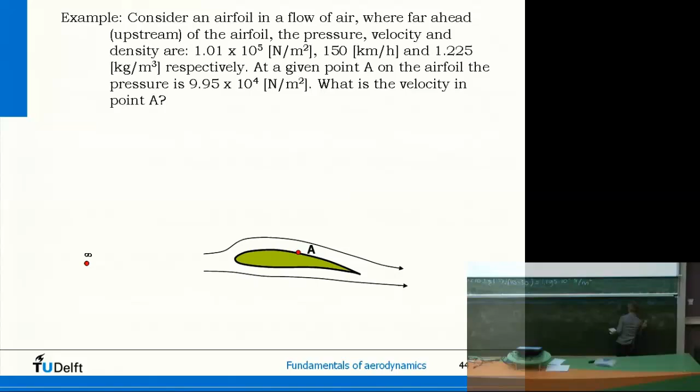Well, and then the first question you should ask yourself, Bernoulli, from where to where? Well, that's trivial, right? From infinity to A. So P infinity plus half rho V infinity squared is equal to PA plus half rho VA squared. We're looking for VA. So that one is equal to P infinity minus PA divided by a half rho and plus half rho V infinity squared. Sorry, V infinity.

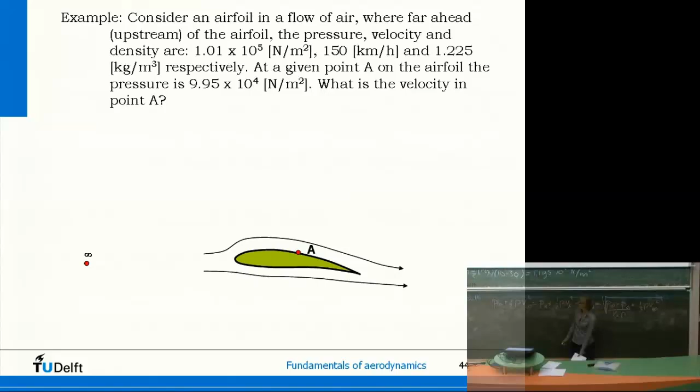Square roots. So that gives us our VA, right? So we just manipulate this equation, take PA to the other side, so P infinity minus PA, divide by half rho, so we get this one divided by a half rho. We divide by half rho. So we have the plus half rho V squared over half rho. So this one becomes simple. So VA is then equal to the square root of 2 times P infinity minus PA over rho plus V infinity squared.

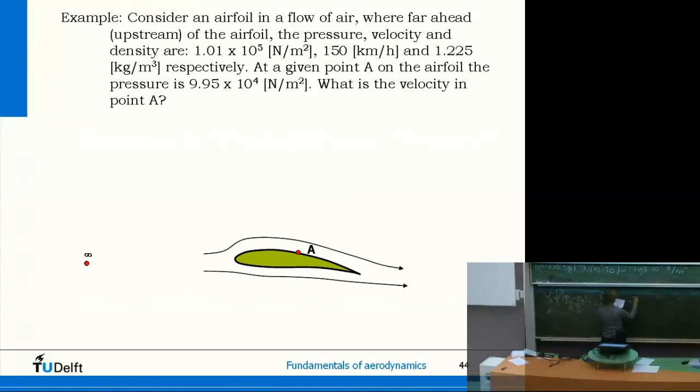Only question is rho. What do we do with this rho? Constant, yes. And it's given at free stream, right? So we take the rho infinity. So we assume constant, so that it becomes simple. 2 times P infinity minus the pressure at point A. What do we do with V infinity? Do I write 150 squared? No? Yes, we have to get it to meters per second.

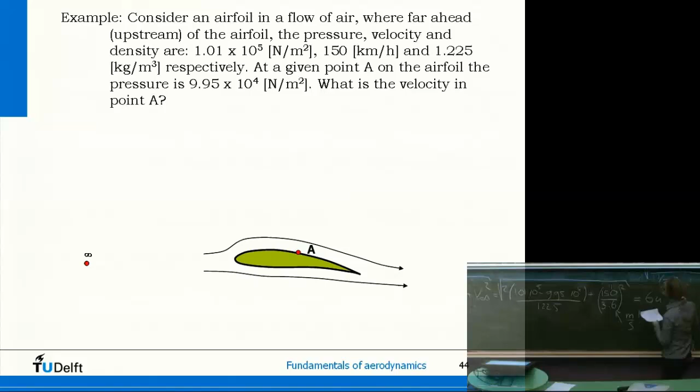So please be aware, you cannot just put in all kinds of units. We have here kilometers per hour and we need to transform it to meters per second. And then we find, for the velocity in point A, 64.7 meters per second. And now it's a good point to do the check, right? If this was above 100 meters per second, you needed to do something different. But we're okay.

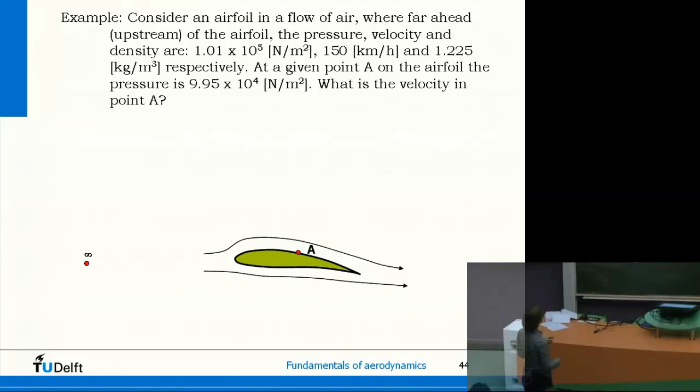Okay, two more remarks. One remark: please practice two test problems, 4.3 and 4.4 from Anderson. Also tomorrow there will be the instruction related to this lecture. Nando Timmer, my colleague, will oversee that, but also there you can practice, but please practice this before.

And then an important remark about tonight. Does anybody want to eat tonight? No? Oh, okay, then it's irrelevant. Tonight there's a lecture of Wubbo Ockels. It's for the Dutch only? Oh, okay. Oh, sorry. You had it already. So no free dinner for you. Sorry.